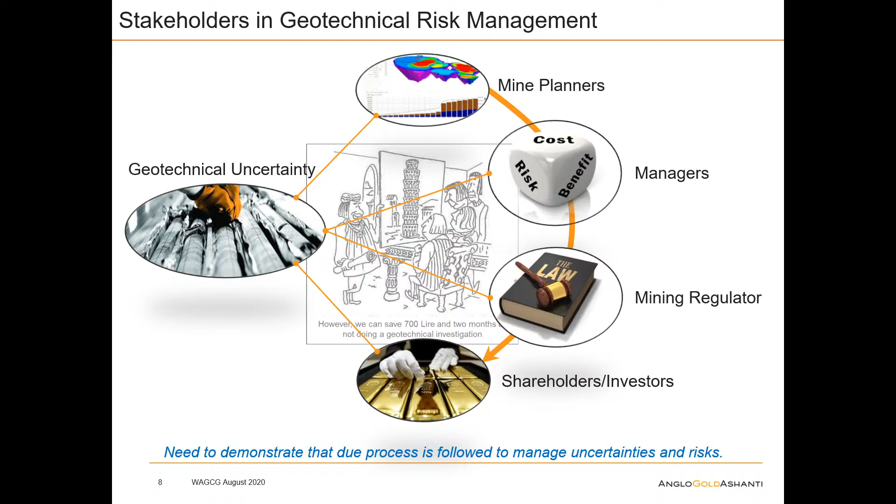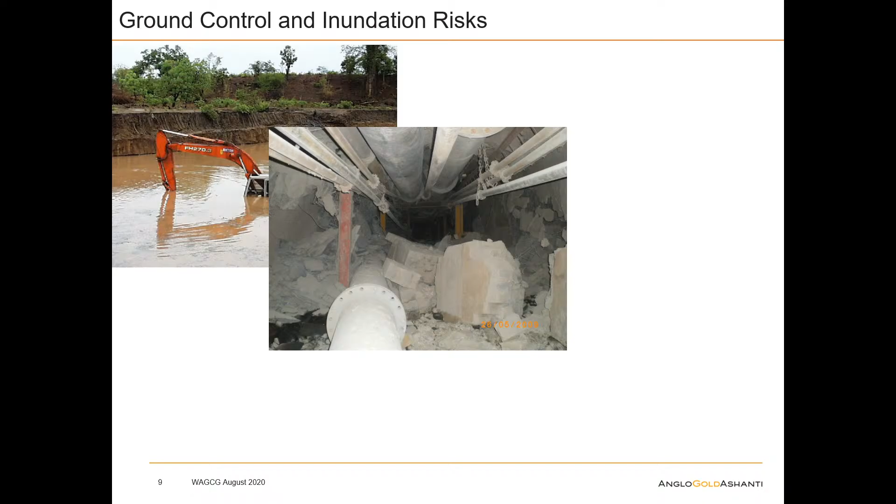Now, what we have here are a couple of examples of ground control and inundation hazards and risks. Unfortunately, when we think about geotechnical engineering, the big impacts are the ones foremost on people's minds, because they have quite major to extreme impacts on the business.

From a safety perspective, it's very possible to have multiple fatalities. From an economic perspective, you may not achieve the life of mine plan. You can ultimately defer or sterilize several reserves, or in extreme cases it can result in a force majeure.

As such, these types of geotechnical related risks should be at least in the top 3 of any mining company's risk registers.

Another thing to keep in mind is this is the type of stuff in the back of the investor's mind, and whether they may ultimately have an extreme impact or not. It is these events that ultimately result in financial losses, and that's because of uncertainty. If we do not understand what they are, we can't identify them, we can't manage them properly.

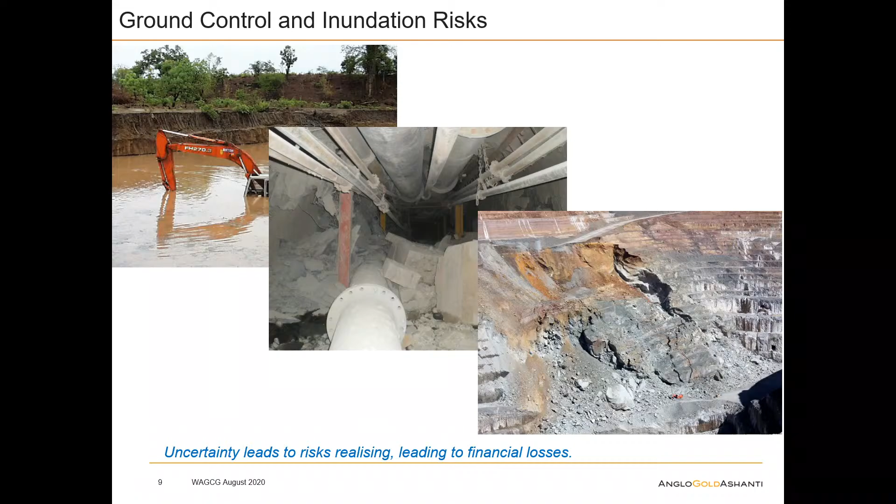So when we look at managing geotechnical uncertainty, it's important that we understand what drives the potential failure mechanisms for a specific design, and what can be considered realistic amelioration options for that design going forward.

So your level of confidence in the knowledge you have about the rock mass is very, very important. In previous presentations, we looked at areas where you see a number of drill holes. Obviously, you don't have drill holes all over, so you need to start inferring some of the information.

As highlighted, you can only infer so far before you've got to understand that's a very wild guess that you have. You need to understand what the limitations are in terms of your knowledge.

For me, the ultimate key is that you need to understand how that rock mass will react when we start mining. There are loading conditions that we start imposing on the rock mass itself, and those conditions will determine how the rock mass behaves and how we can actually treat it so that it doesn't cause problems for us going forward.

One area that a previous colleague of ours, Joe Siri, worked on quite a lot—he's doing that in his private time now with his own little Bastion company—is looking at the reliability of the data available and the assumptions that need to be made because of limited information or because of the information you actually have available.

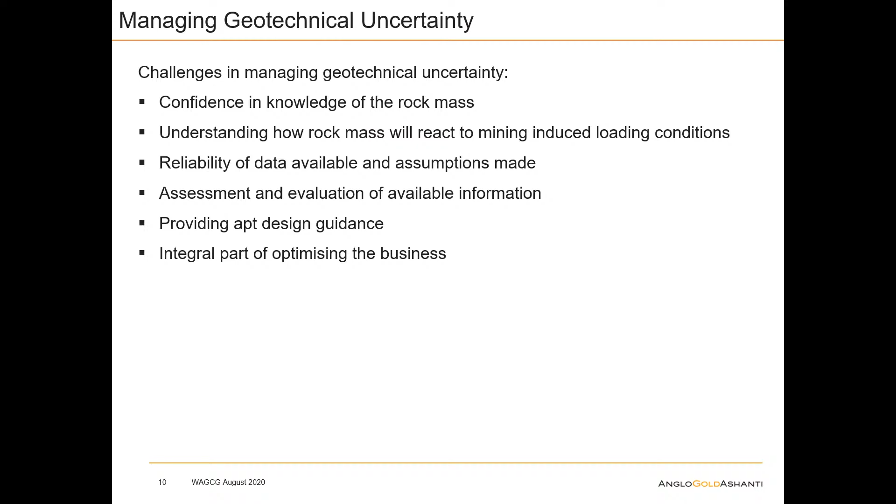The key thing there is that you can't work in silos. It needs to be an integral part of the whole process. Geotechnical engineering, mine planners, production people, geologists—everybody needs to be talking together the whole time if we want to be in any position to properly manage the different levels of geotechnical uncertainty.

Gambling is a good way to explain it.

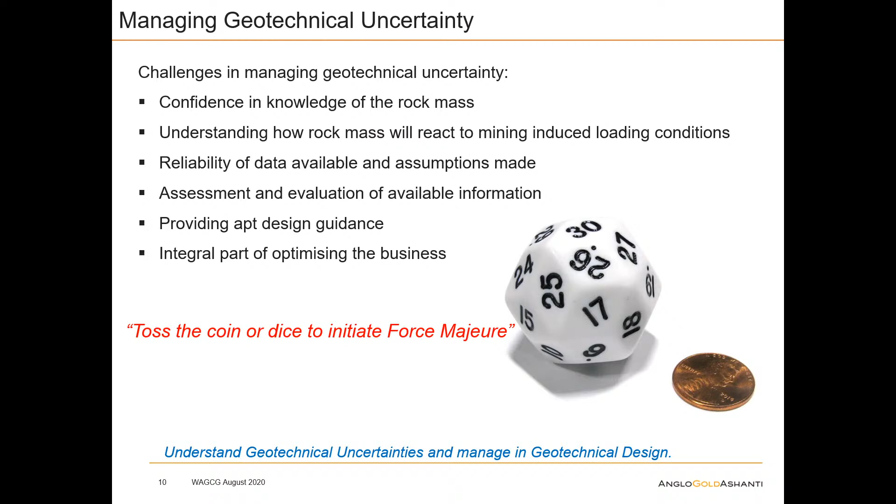What would you like to have if you understand that you know about one thing, and there's a whole lot of others that you don't know? It's a toss of a coin. But if you can actually start identifying what each and every one of those potential uncertainty areas are, what they are, and be able to describe it, you get a little bit more of these Dungeons and Dragons type of dice. That unknown that you don't know about is much less likely to occur. So it's important that we understand ultimately what all the geotechnical uncertainties are, and that we can thereby adequately manage it in the geotechnical design.

Now, any well-founded mine design, we've got to understand, is reliant on a specific level of geotechnical effort that has been put in, that's appropriate for the level of design. We do that to provide assurance that that specific mine plan can actually be achieved. Now, in this little breakdown, there's 8 different input areas that we've identified that we need to adhere to in order to demonstrate that sufficient geotechnical work has in fact been done to manage the different geotechnical risks through the process of geotechnical design.

Now, when we look at mines in the operational phase, obviously the level of confidence that you have to have at the operational phase is going to be much higher than for mines that's say, for instance, on a feasibility or a pre-feasibility level. But for argument's sake, let's say there is a mine that is operational, and you go through the review and you see that maybe the geological model is up to spec, the structural model is up to spec, but not that really good about the rock mass fabric. It's important that there's some plan put in place to identify where you are lacking, perform a gap analysis, and use that to define the work program that you need to put in place to get up to the required level.

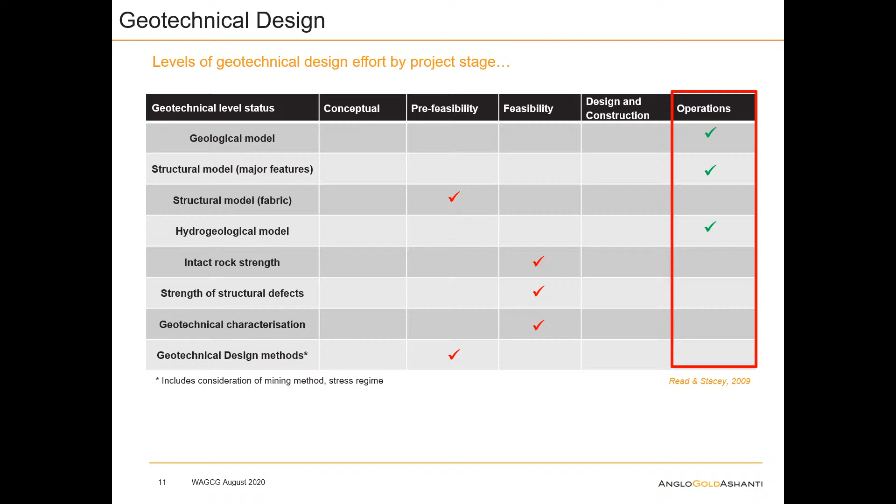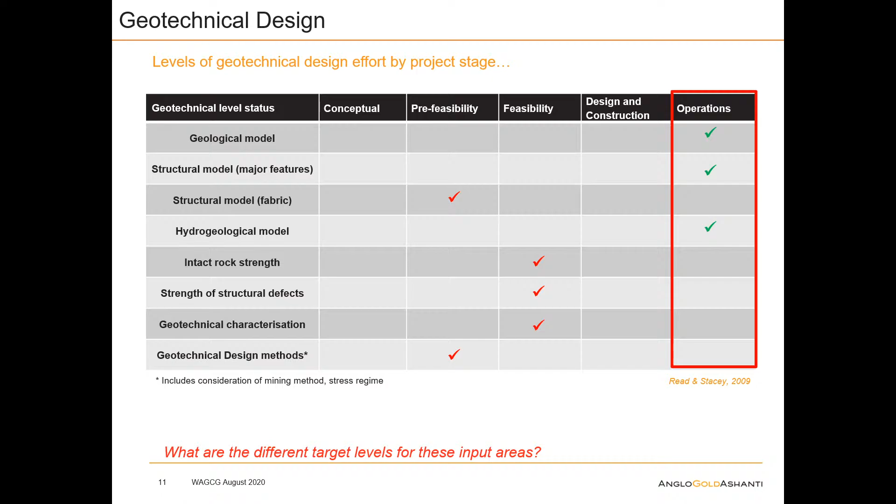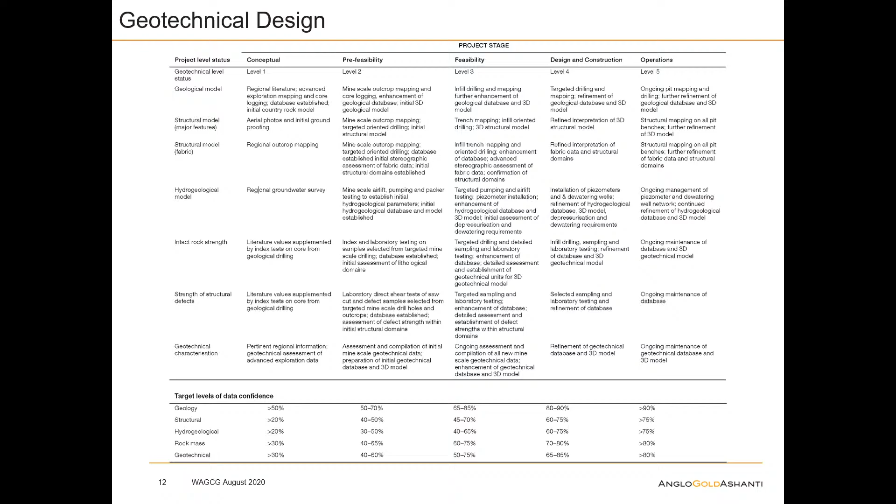Now, that's the broader sort of picture. Now you obviously want to know what exactly are the little different detail levels in each one of those input areas. Some of you might be familiar with this table. Don't worry about reading it. It's just the table that has been put out in the guidelines for open pit slope design. This has largely formed the basis for the table that we use to populate what the requirements would be for each project phase on each one of the data requirement areas going forward.

We've expanded that a little bit to cater for the different impact levels. We realize there's a number of mines where they might go into a specific area, mine a satellite pit or something like that. That satellite pit doesn't really have much of an impact, and trying to impose the same level of geotechnical requirements that you would for a $5 billion project just doesn't make sense. So we've broken it down into the potential financial impact in terms of a low, medium, and a high scenario, and that guides through conceptual, pre-feasibility, feasibility, all the way through to operations for each one of these categories - what we consider to be the minimum requirements for a specific geotechnical design, the input to a geotechnical design going forward.

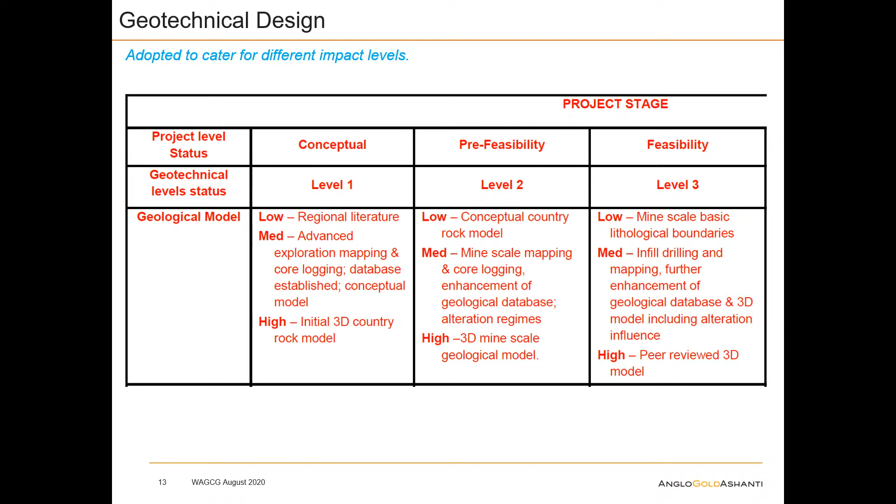So, if you look at the typical completed geotechnical design, we need to make sure that the engineer can communicate the risks and the various specifications, parameters, the different options pertaining to those parameters. And of course, as I mentioned earlier, it's not just about those geometric items, it's about the operational considerations for the specific plan.

Open pit, the plan doesn't change that much, but underground, the plan changes almost on a monthly basis. I'm pretty sure that over the last month, especially in gold mining companies, as the gold prices has soared, those plans would have been changing on a weekly basis. So we need to be able to provide a detailed description of the geotechnical risks in the plan, where they occur, when they occur in the schedule, and what exactly happens. It's all good and well to say you've got a risk there, but you've got to explain to the people what exactly that risk will entail, what we'll realize when that risk happens.

The mining geometry parameters, knowing what every dimension and angle or shape would be for that specific plan, is very important. There are certain parameters chosen by the mine planner based on equipment capability, but ultimately those parameters, say for a bench height, if they can drill 20 meters, will impact the bench face angle or catch bench. Same with the stopes - if there's an interlevel spacing of 25 meters, that will ultimately impact things.

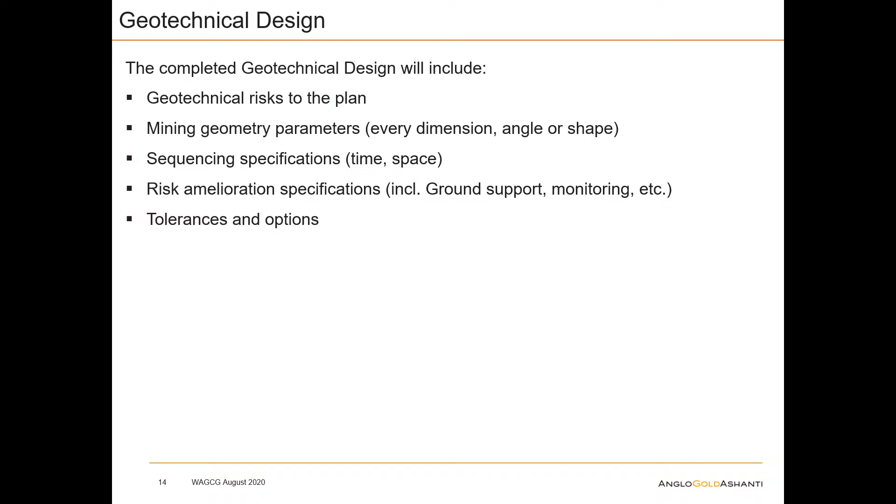But you've got to be able to hammer down that if you mine this specific stope, you cannot afford any mistake, because the impact for that stope may be significantly more than for another stope where you can mine 5 meters more - it wouldn't make that much of a difference. So it's important to understand what the tolerances are, not just in the rock mass, not just in your support, not just in the monitoring equipment you use, but in terms of how the total holistic view happens for that specific mining area. And then, of course, what's the options you have? It's all about optionality.

Operational considerations we've spoken about already. We tend to provide, let's say for instance in an open pit scenario, you tell the mine planner that your inter-ramp angle is say 55 degrees, your bench face angle is 85 degrees, your berms need to be 12 meters wide because you're mining 20 meter high benches.

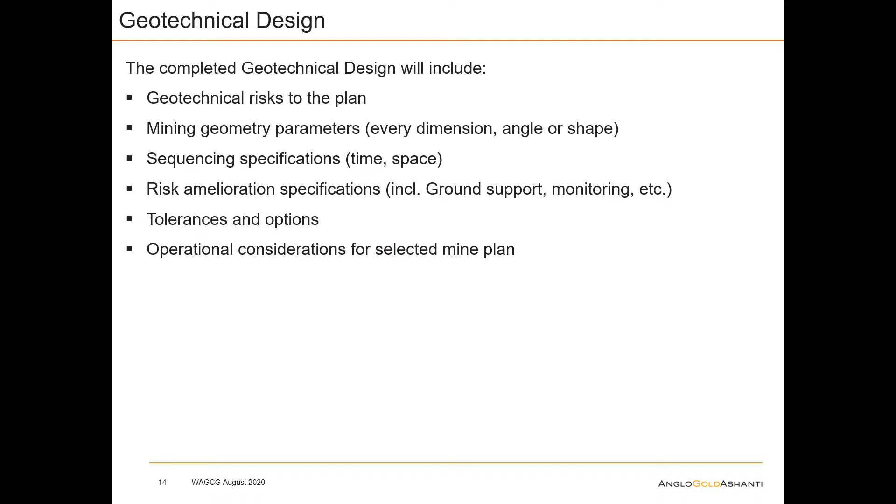Remember, it's about the geotechnical design and how we communicate those modifying factors, and how that eventually feeds in, directly or indirectly, whether you know it or not, into that final report released to the public. So if you go to your company's website, get the annual report, wherever there's a reserve declared, your input is there.

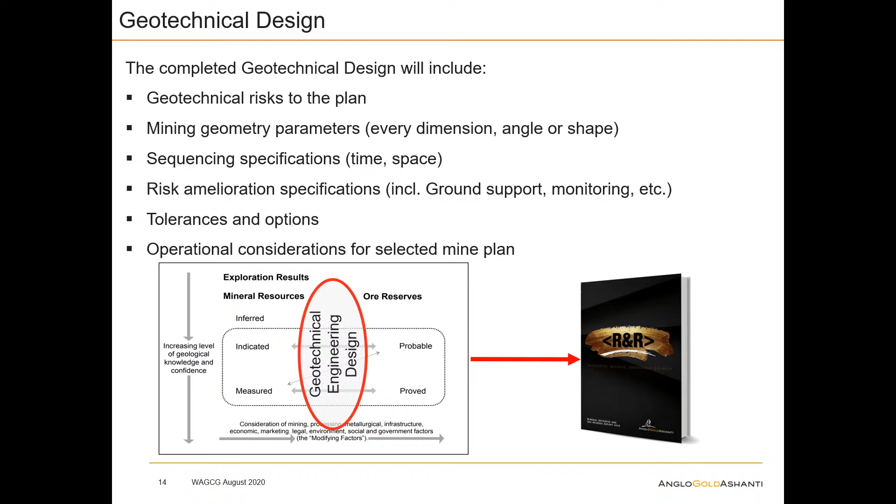Brocky, apologies, I should actually put that down there. This is a Brockman design. If you don't know, Brock is the first person I knew that could actually get extraction ratio onto a geotechnical block model.

What that does is it facilitates communication. Us talking about a number, Q number, whatever the tensile strength of some support unit is, it means nothing to the rest of the guys. They go blank, they don't know about it. But when you start talking dollars, actually physically pointing where stuff is happening, you get much more of a communication going.

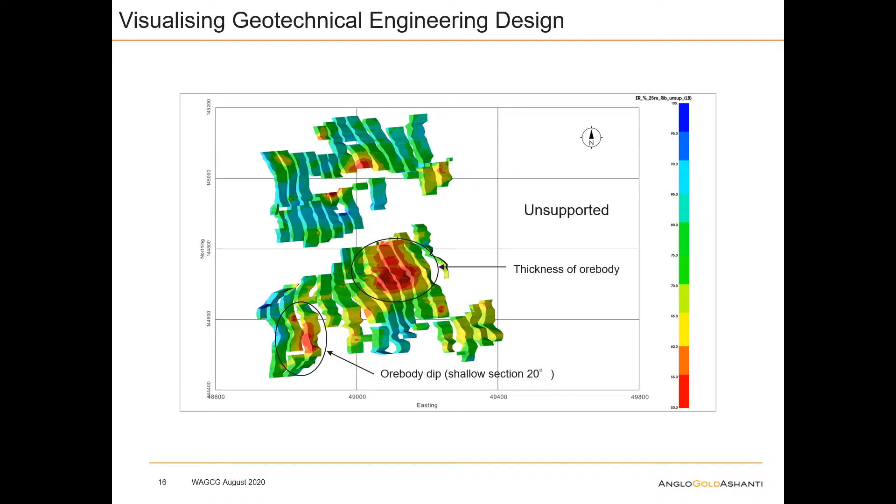What's the left and right buttons for then? Left and right, okay. Okay, I'm going backwards now, so anyway, let's not digress. There we go, now it works. I think somebody did hack your computer. So, little red button, there we go.

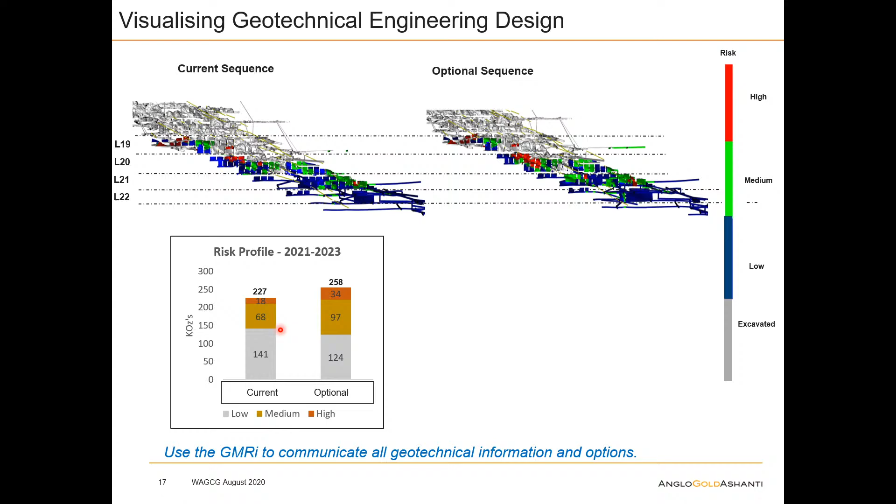You also know where those stopes are. Now you can make decisions on what you need to do to manage the risk in those specific areas.

So just in conclusion, it's important that we as a geotechnical engineering fraternity can have discussions with mine planners, with management, with the decision makers on what the different risks are. Now over the years in mining, what I've seen is that there's been more loss of opportunity that has happened because of the lack of geotechnical input than these extreme events.

That would have happened. Some of the miners can sort of manage it. That one slide, they know how long they can drive the trucks. They'll tell you they know how long they can drive the trucks over that crack in the pit wall before they have to pull it back. I mean, there's nothing more knowledgeable than a production engineer.

But I guess we just need to keep in mind that we are in fact altering nature, okay? And nature's got no interest in whether our budgets or schedules or plans are being kept, okay? It's only interested in re-establishing that equilibrium that we have disturbed. As such, we got to always remember there's certain limits that sometimes we just cannot physically exceed. But we need to have a detailed understanding of everything to be able to make those decisions and to understand what it is. Well, thanks, guys.

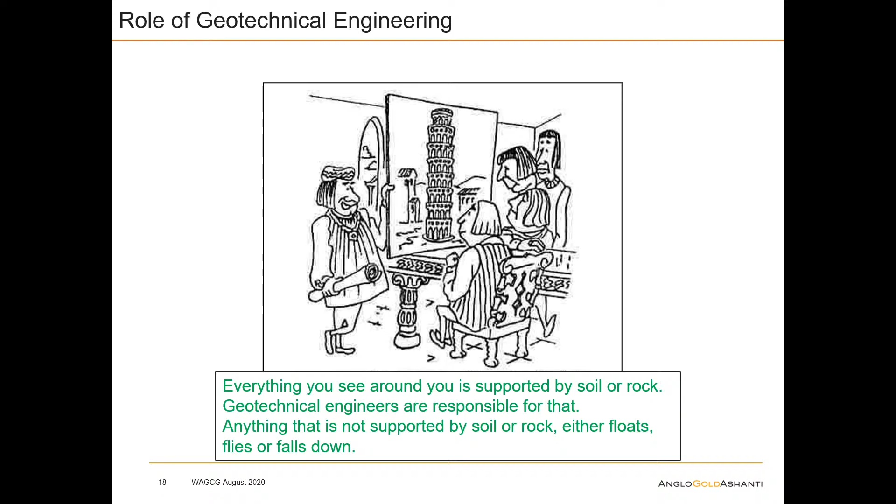Any questions? Thank you, Emrich. I think definitely Anglo got a chance to tackle what you were saying, especially after the production engineering comment. So yeah, thanks, Emrich.

Just a quick question there. Just for my purpose, just understanding the risk again, trying to get my head around what are we trying to communicate. If we're saying that we're sitting in the high risk category, does that mean that we're at risk of actually not retrieving such ounces, or is that just at risk of diluting it too much and thus higher cost, but you're still getting your ounces? What's your definition of those risk categories?

It can be both, okay. I mean, it depends from stope to stope. So let's say these chairs are different stopes that we have to sort of mine. Now, if I start a sequence from the furthest one coming into this direction, and say for instance I've got a fault that's sort of dipping up, right?

Obviously, depending on which way you mine, somewhere along the line that fault might initiate and eventually start causing dilution. So if I come from this side, maybe the scenario is such that I only run the risk of exposing the fault when I get to the last stope. And hence I've mined all this, and ultimately that's the low risk scenario. But that stope is the one that's at risk.

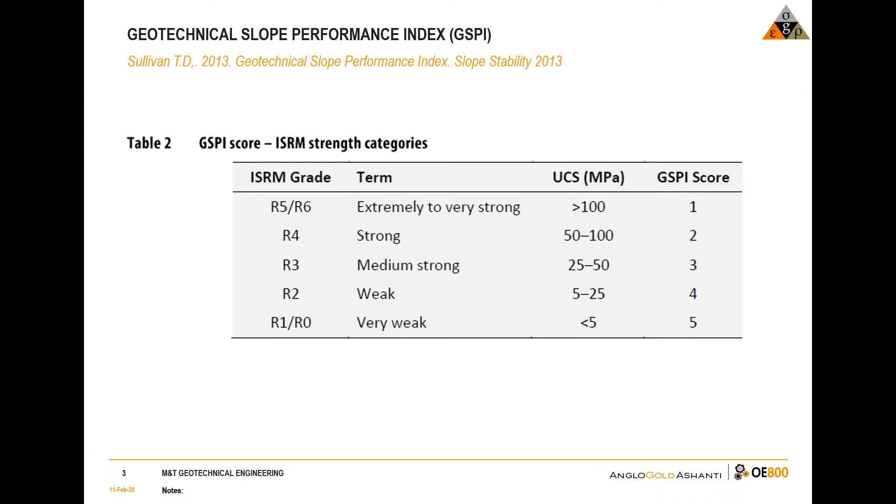And I know this was one of the big criticisms he got when he published the paper - people were very upset afterwards. But be that as it may, his answer was that he assumes the slope is already designed, so this is not a design tool. This is just a performance indicator afterwards, and it's got some interesting results. So the second score - you would have seen this figure.

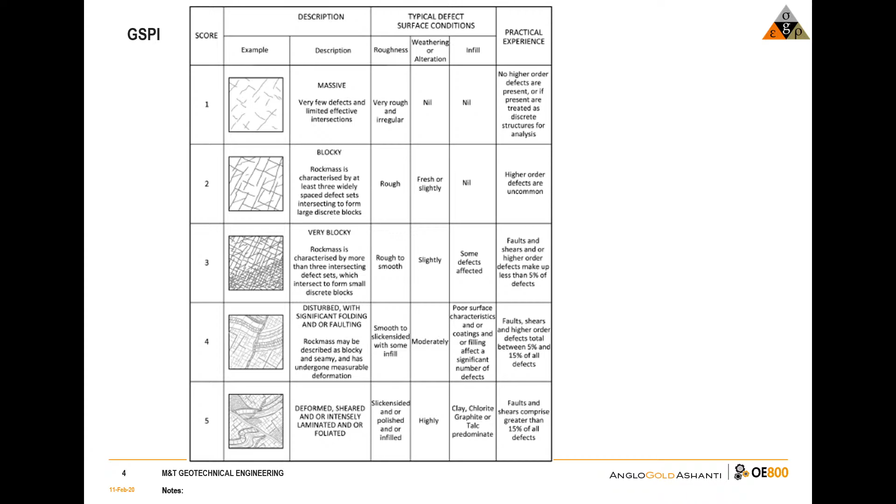We all know and love this figure from Hoek on the GSI, and he's just given some extra descriptors, and he essentially scores it, again, 1 to 5. It's very coarse, but we can agree that better rock is better than worse rock, so we add the score up. This is an interesting one, and if you're struggling to get to grips with rock mass ratings and you're new in the business, read his paper. If you get nothing else out of it than the description of why this is worth looking at, I think you've learned something. There's a lot of older rock mass papers that try to communicate this concept, but I think Tim's got a nice way of explaining it. So just look at that.

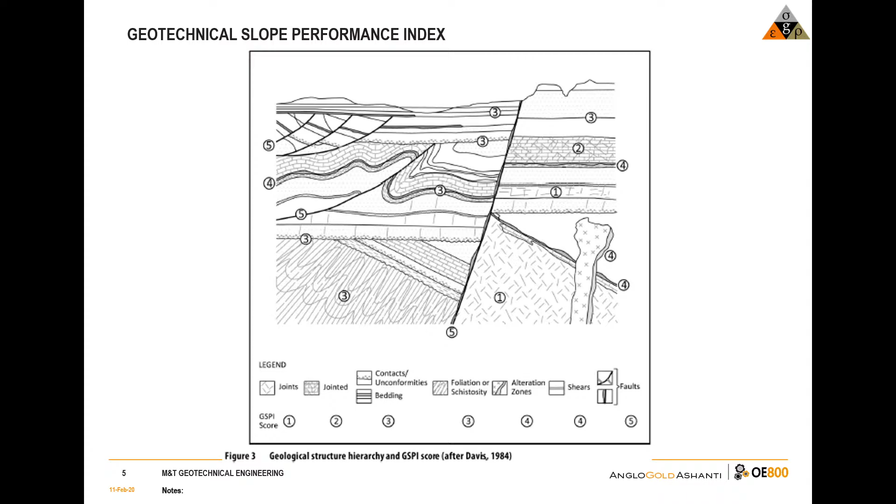Essentially, this is a broad diagram with all the possible geological features, and he gives you a score again from 1 to 5. So for example, in massive rock you're probably going to have better performance than where it's a 5, if you've got predefined sheeting joints or so on.

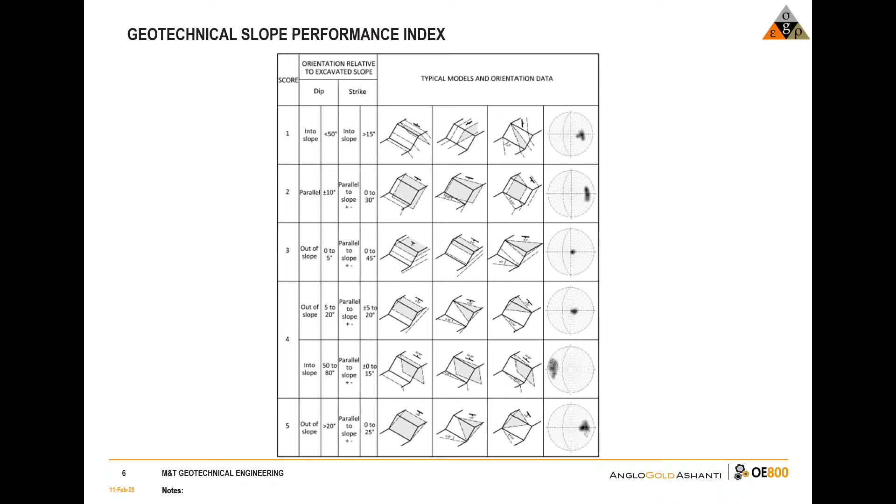So obviously there's some value in this. Then this is quite a difficult one - we've got orientation with respect to the slope that needs to be incorporated. So immediately this GSPI is not just a function of the rock. You can't say this is a rock with a GSPI of 20. No, with respect to the slope, the GSPI is 20. It takes a bit of time to figure this out. This is probably, if you're going to use the GSPI in a block model sense, the most difficult bit to program in, because you need an if statement - if the slope does this and the bearing does that. This is really the most difficult equation. For those of you who use Peter Lilly's blastability index, there's a very similar rating that deals with this, and I often wonder if you can correlate the two, or possibly get rid of one and use the other. But again, score from 1 to 5, good to bad, as a contributing factor.

This is another interesting one. We all know if you look at Bieniawski's rock mass rating, there's a score for water. If you look at Laubscher's rock mass rating, they've got all these descriptors. Q's got some water descriptors, and that's all fine. But in terms of slopes, really we're looking at effective stress. We know this, right? And I just thought it's interesting that these descriptors are actually based on the water level in the slope, and you can equate this to Ru values for those of you using Ru values. But again, no water is better than lots of water, and there's your score.

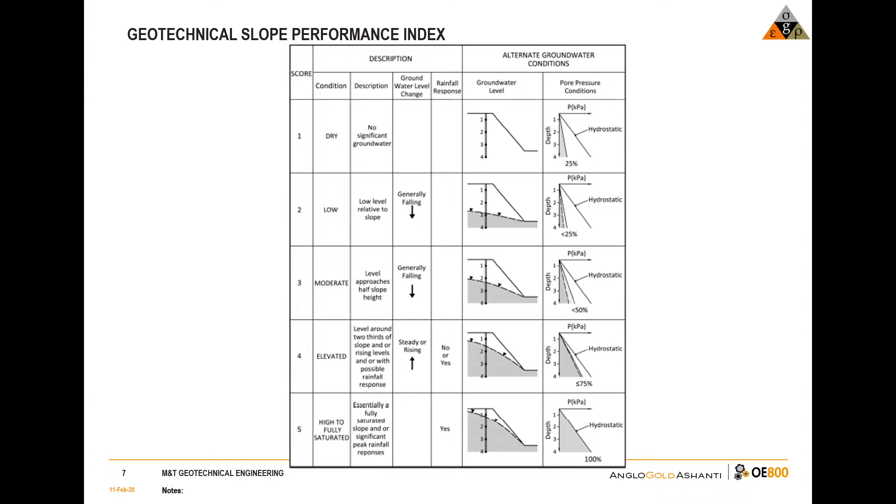So he's essentially scoring the contributing factors to risk, and then finally you add them all up, you'll get a score between 5 and 25. 5 is fantastic, 25 is really bad. He says in the paper that he's got a database, I think it's 130 slopes, and he's correlated that. I would have loved to see the database - being in mining, I suppose he wasn't allowed to share that information.

But essentially he says that if you use his strength classification, or the PSM classification, generally, practically you'll get 5 to 22. These are the types of failures - this is your performance classification. There's another table in the figure that we don't need here, but in the paper, if you go to it, you actually correlate the scores to the scale of failures you might get. So at the lower end you might have rockfall, then you get berm failures, and then interramp. Without the database, I'm not sure if you can really use it like that - it's probably better to do a mechanism-specific analysis.

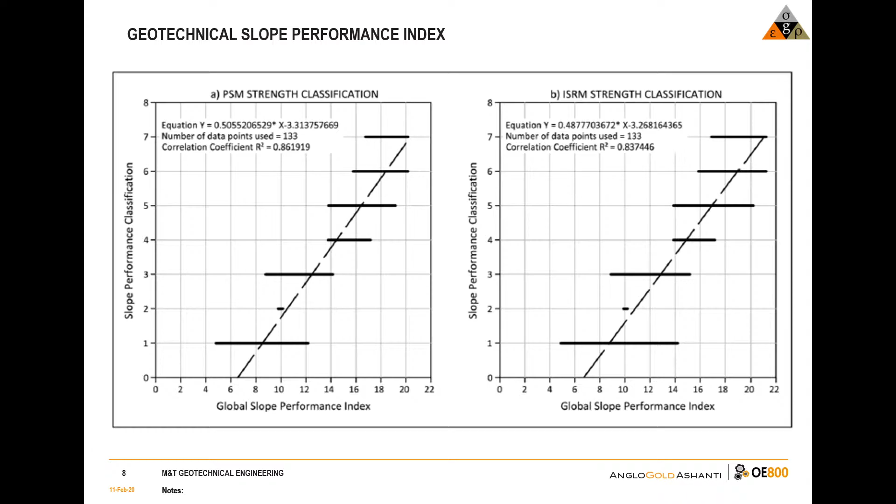But in general, that's good, that's bad, and if you want to risk assess your schedule, this is one way of doing it. Now I'd probably take Cobus's approach and say, well, what's important for your mine? I use this for illustration purposes, and I'm starting to look at it. But if you realize that for your mine a particular combination of factors becomes really important, then build that in - forget about this. The take-home for this presentation isn't to use Sullivan's rating, but rather the idea that you can populate a block model with your risk, and that it can be useful.

So how about we populate the individual scores for the GSPI index or some other index. It doesn't matter which one you use as long as it's relevant for you. Imprint that on the pit shell, and that's very easy to do in Gem4D, right? And you calculate the GSPI, and in this case I've actually managed to put the two major joint sets into the rating as well. So what I've done for this one is the rating that looks at the orientation of structures with respect to the slope. I've just picked the worst one. So I calculate that for the two major joint sets, and then for the GSPI I picked the worst one to try and get the idea. So it's not a proper kinematic analysis, but it's not irrelevant either, right?

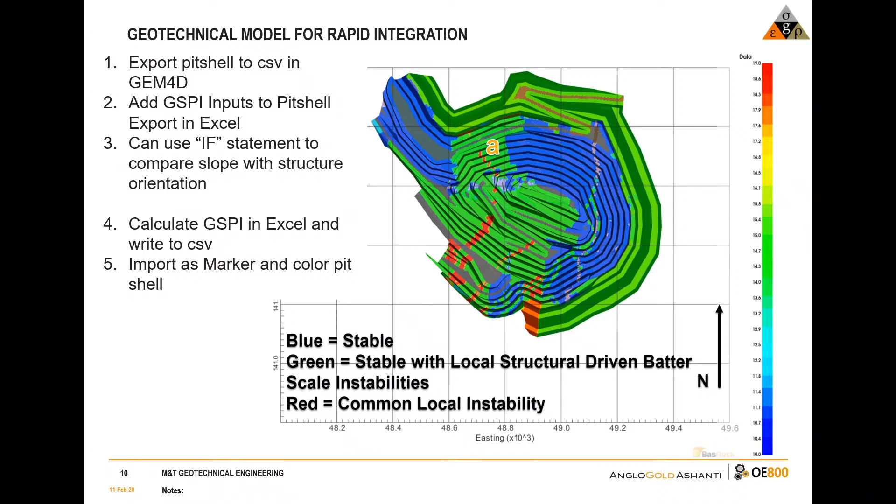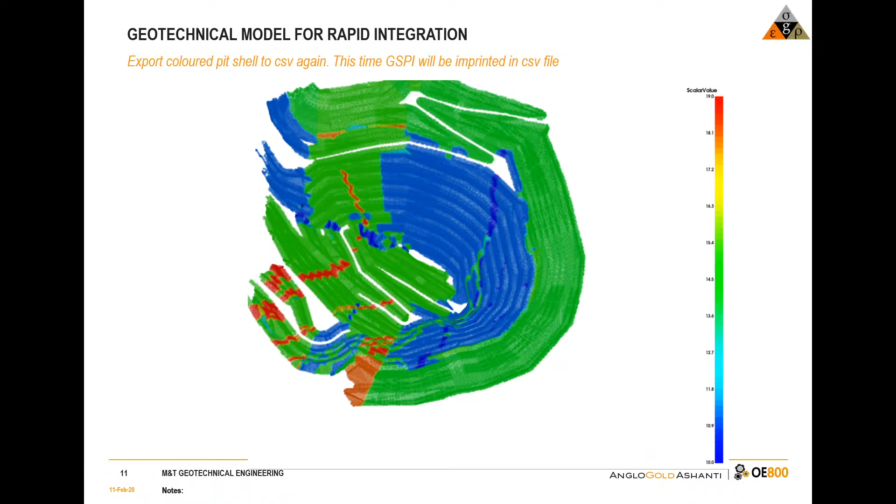And then that's essentially what you get. Then you can export that colored pit shell as a CSV again. But in Gem4D, the risk rating will then be written as an additional column. So now you have a CSV file with X, Y, Z, and risk as an additional column. And if you bring it back into Gem4D as markers, you've got this ugly one. Each one of those fluffy little things represents an actual coordinate. And in this case, it's from 19 to 10, as per the colors. So the actual way to do it - now you want to get to, you've risk assessed your pit shell, right?

And you know where you're going to get issues, but you still want to put that onto your schedule. And that's actually quite simple.

So what I've done here is create a grid bounding box, again a Gem4D function. As Frans explained earlier, you've got this massive bounding box, but you don't want that for this. You only want grid points where you're actually going to mine.

So what you do: you create the bounding box, export it as a CSV, a simple function, then import the CSV as a marker layer, then filter the markers to only be inside the pit shell. You've got the pit shell as a triangulation, so it's very simple.

Then you export this grid marker data as a DXF, because you want the DXF to write your risk onto it. You bring it back in, open the DXF file, then open your GSPI file as a CSV, and write your CSV data for your risk onto your grid points as a DXF. There's a lot of importing and exporting in this process, but it sounds a lot worse than it actually is.

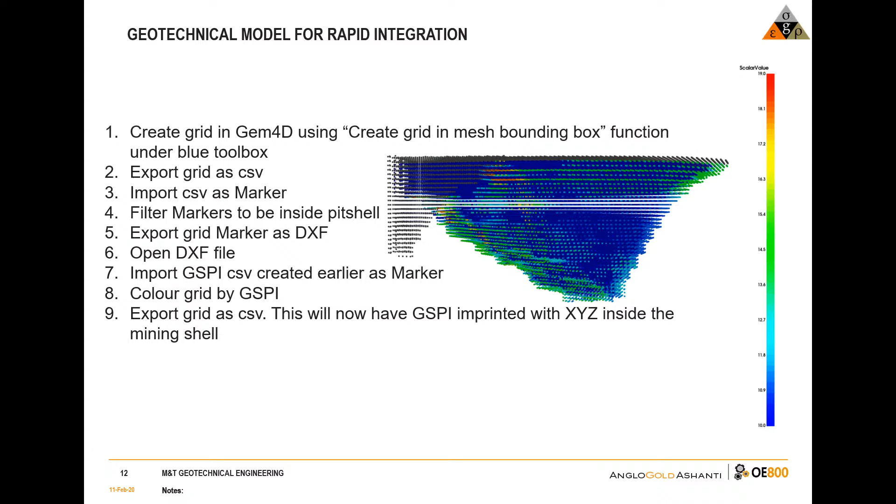It takes minutes. Then you color the grid by the GSPI, and then you export the grid as a CSV. And voila, now you've got a table.

You've got a table of your risk versus your coordinates. And essentially, if you bring it back in, just to show you, you'll have each point with the risk color-coded onto it.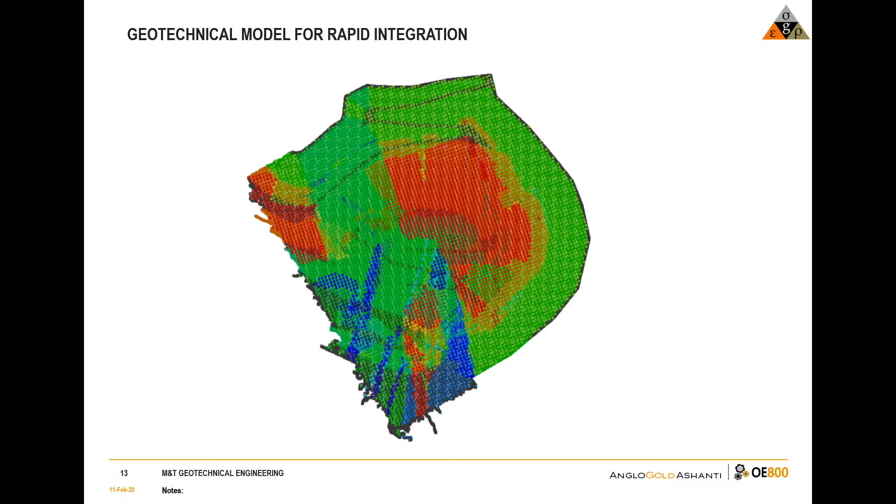If you wanted to, you can look at horizontal sections, so let's call it bench plans. And yes, there are, because I've used Gem4D, and in this case I just use nearest neighbor, there's a lot of, if you wanted to be really more precise, you could argue to yourself, well, I've got a green bit there and a blue bit there, but is it right?

Did I color the green far enough? And nothing stops you from adding additional points if you wanted to make sure that you cover a certain part of the pit floor at the time with a new risk. You can do that if you wanted to. I didn't do it here, but you could.

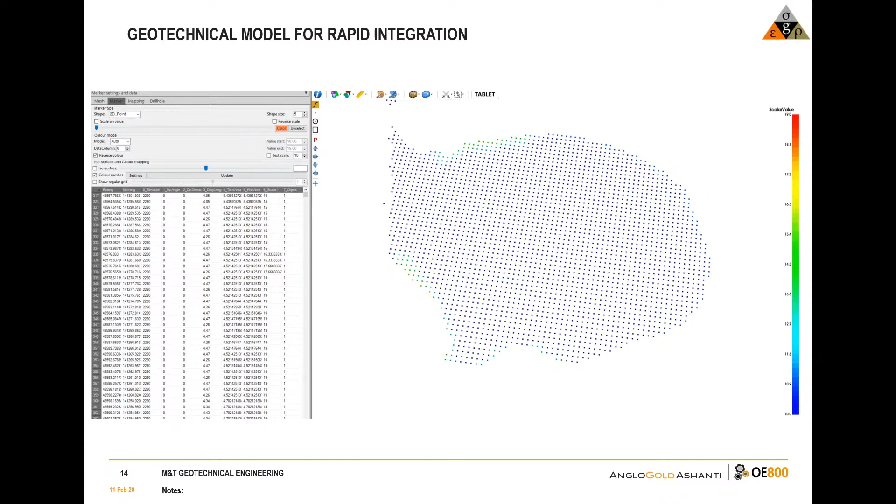And finally, you end up with a table that is XYZ. You've got your dip and dip direction, but ultimately what you really want is your GSPI. And that's it. Now you get your mine schedule from the mine planners.

I haven't done it in this case. As I said, this is hot off the press. Some of this was done last night. But you've got a database. Each block in your CSV represents a certain volume, right?

And from your mine planners, you can very simply get a schedule that says, well, this block is going to be mined at this time. For underground, I know you've used the centroids of the stopes. One potential way that I worked out with our mine planners was, well, what if I use the end of month or end of period triangulations, and I can just filter these points by period?

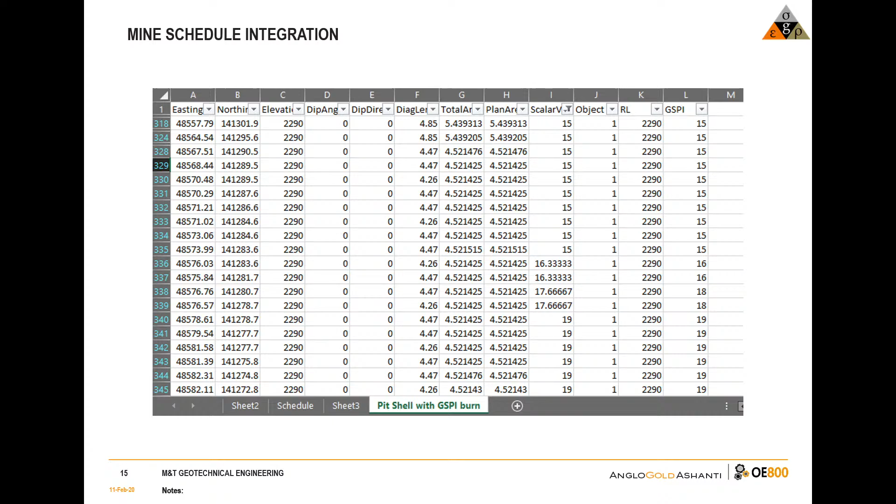Again, just adding another column of when this will be mined is not difficult. It's something that you can fairly easily do.

And then the last thing, because I didn't have a schedule, I just separated this by RL. And this is again from that database in an Excel pivot table. Group it any way you like. I've grouped it by RL, so this is 2380 right at the top, and that's 1980 at the bottom.

This is the percentage of tons to be mined, which I'm presenting here. You could do this by ore grade. You can pick it by any factor that you think is useful. And essentially, you're saying here that if you look at a range of scores 10 to 19, in the beginning we're going to have some 14s.

Why so much risk in the beginning? Well, it's saprolites, right? We've had some historical issues. There's faults driven, you can get erosion. So we know the saprolites have a little bit of risk.

Then you get to the end of the saprolites, and you start going into the greens, which is much lower scores. However, some of the slope will be on the footwall, and that's the bigger bit. And some parts of the footwall, particularly the RLs where the structures intersect, you'll pick up some blobs of higher risk. So immediately you can plan things.

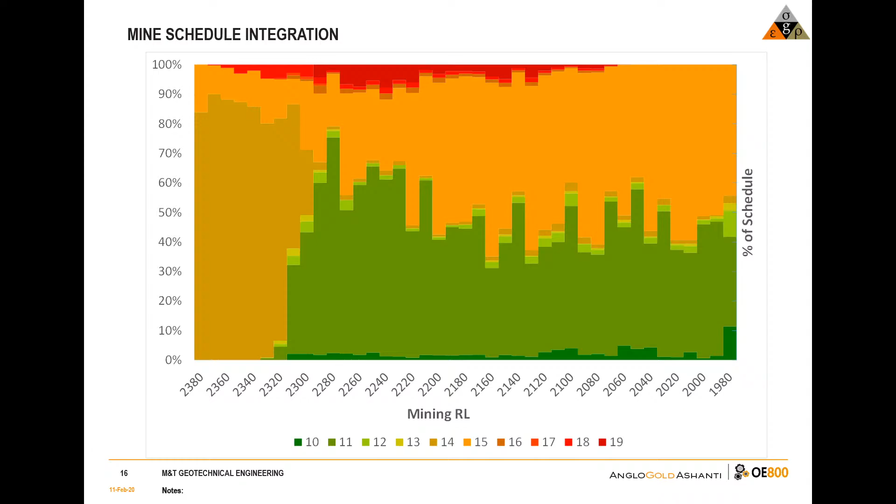Now in conclusion, as Kobus and Emrich said, firstly you can assign a GSPI or any risk score to each mining block or mining time period, which is quite useful. And then you can optimize your schedule around mining risk.

Now, I know this is something we were really trying to get to. A couple of years ago, one of our mines in Brazil wanted to open a new open pit close to an underground working. The initial risk assessment said no, we can't do this, we just have to leave the pit, because if it rains too much there'll be some interaction.

But then we did a proper risk analysis. We worked out - we didn't quite do it this way, but we tied the risk to each month, looking at the rainy season and risk and so on. And we worked out, well actually we can mine this pit.

Because what the risk assessment told us is that we have 8 months - we have to do the whole thing in the dry season, and the moment the rainy season starts, certain controls need to be in place to protect the underground workings. And we got that. We had a schedule.

We knew, firstly, we can mine this, which is awesome news for the mine planners and for the managers. But the second thing is we've got a list of things to do. There's certain things that we have to have in place at certain times, or mining stops.

And we did that. We did mine it on schedule. We did have all the controls in place. And as luck would have it, we had a 1 in 50 year rainfall event almost the first week of the rainy season. And you know what? It didn't cost us any ore. Nobody got hurt, no equipment got damaged, because we knew we had to be out of there at a certain time and with certain controls in place.

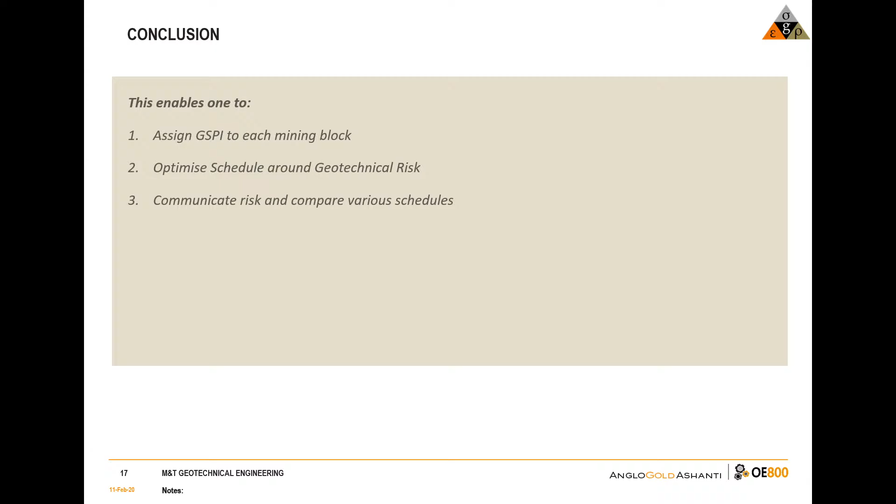And that. There you go. Thanks. I have to apologize, I've got a meeting. But I didn't want to - I need to put my presentation here.